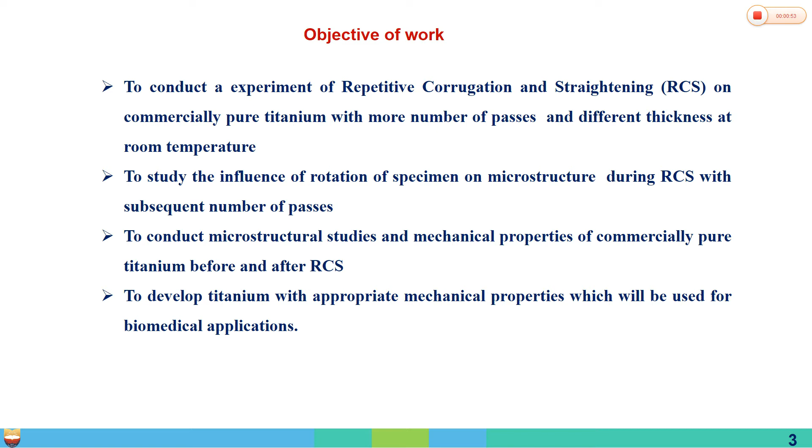We conducted a review of the literature related to this work. Different researchers and academicians worked on different severe plastic deformation techniques in order to increase the strength of commercial pure titanium. Some of these I have highlighted here. First is the ECAP route used for increasing the strength of commercial pure titanium. They achieved good strength and tensile properties by using the ECAP BC route compared to the other routes.

Another researcher investigated the microstructure and mechanical properties of commercial pure titanium processed by the twist extrusion technique. They achieved good strength by reducing the grain size to less than 1 micrometer, which enhances the strength of the material. Another researcher processed pure titanium with the accumulative roll bonding technique. They achieved an 80 nanometer grain size after 5 ARB cycles. After 6 passes, the strength of the pure titanium was almost equal to the strength of Ti-6Al-4V.

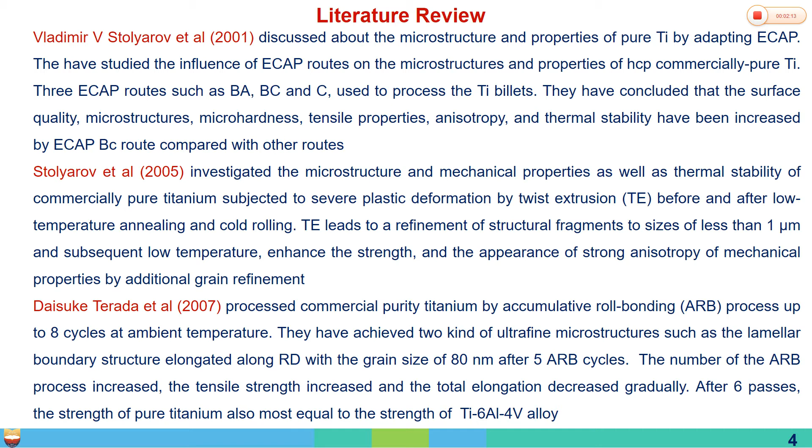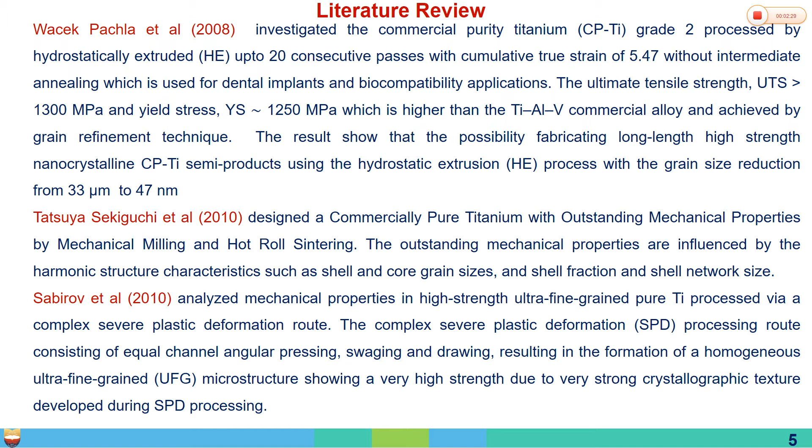Based on this work, different techniques have been used to achieve a strength of commercial pure titanium equal to that of Ti-6Al-4V. Another researcher hydrostatically extruded commercial pure titanium up to 20 consecutive passes. They achieved a good yield strength of 1250 and an ultimate strength of 1300. So out of this literature, the summary says that

commercial pure titanium strength was increased by grain size reduction or grain refinement by adopting different severe plastic deformation techniques. So from this literature we came to know that severe plastic deformation increases the strength of the material and also increases the tensile strength through grain refinement and grain reduction.

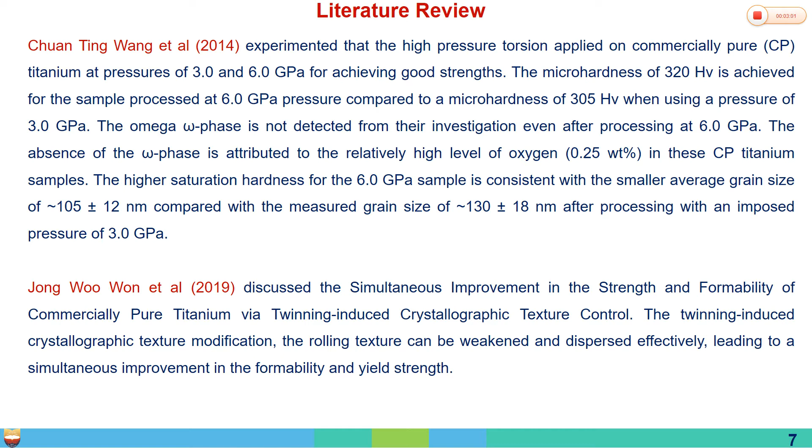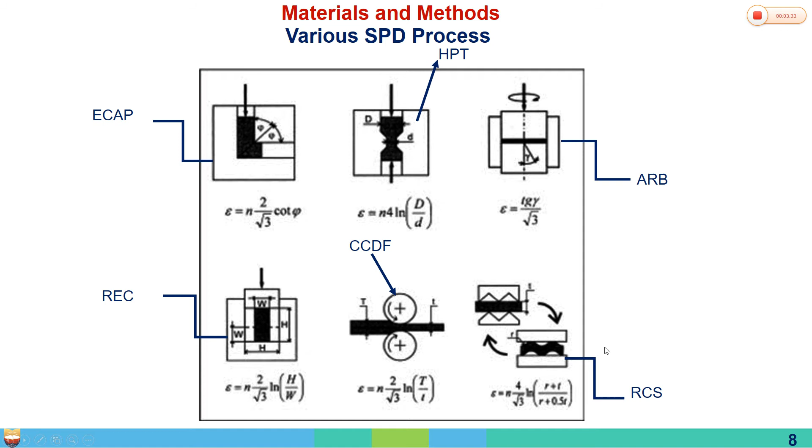Here are the materials and methods: various SPD techniques, as we have seen in the literature. ECAP, HPT or high pressure torsion, ARB or accumulative roll bonding, repetitive corrugation, and closed die forging. These are different severe plastic deformation techniques. Out of these we have chosen repetitive corrugation because with this technique we can easily process material sheet or plate, so it can be used for mass production also. For that purpose we have chosen this technique.

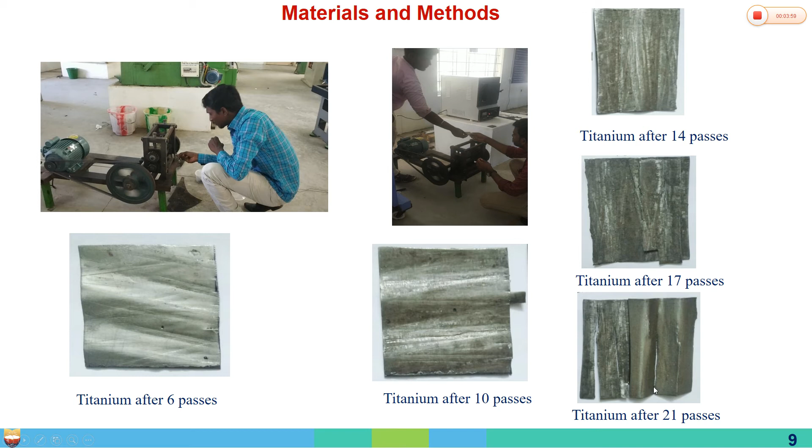These are the students who were involved in doing the experiments. This is the repetitive corrugation and straightening machine. There are 2 rollers, one for corrugation and one for straightening. These are the specimens after a number of passes. You can see the difference between 6 and 21 passes, and that the material has been strengthened. An annealing process was also adopted.

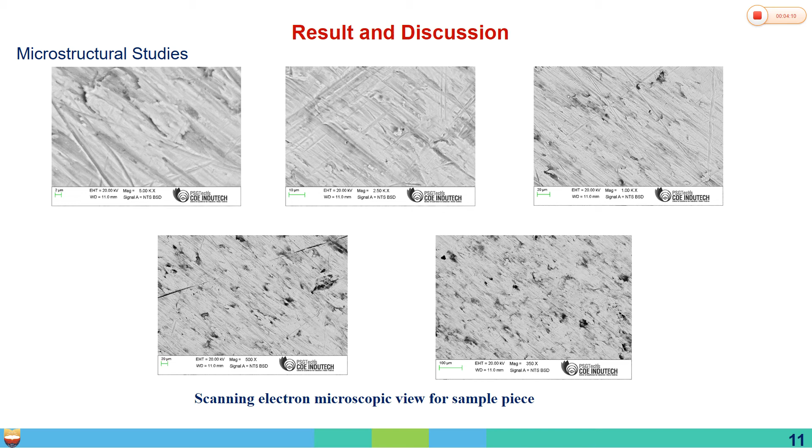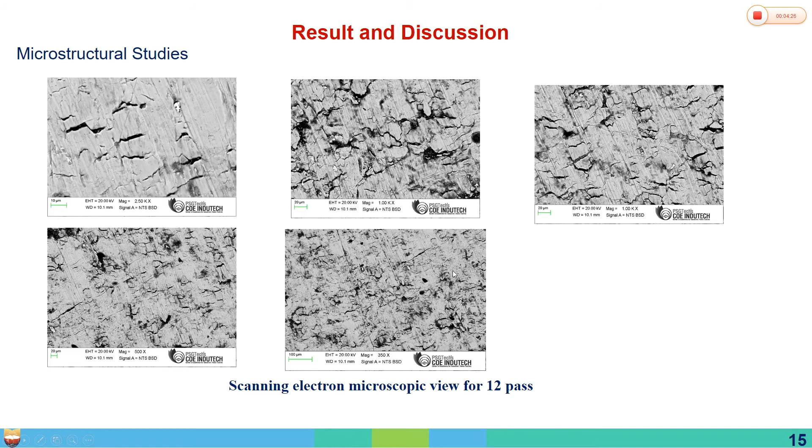The SEM image microstructure shows the raw specimen, and the microstructure after 1 pass and a number of passes. After 12 passes, grain refinement and reduction take place, and after 21 passes you can also see grain refinement taking place, and after 24 passes in the annealed condition as well.

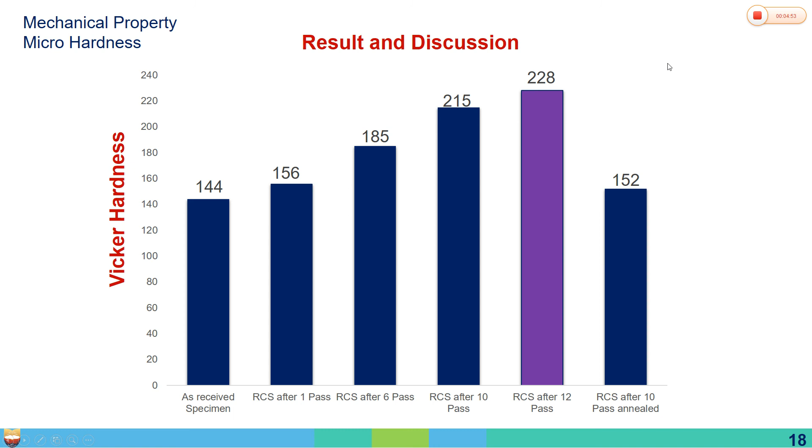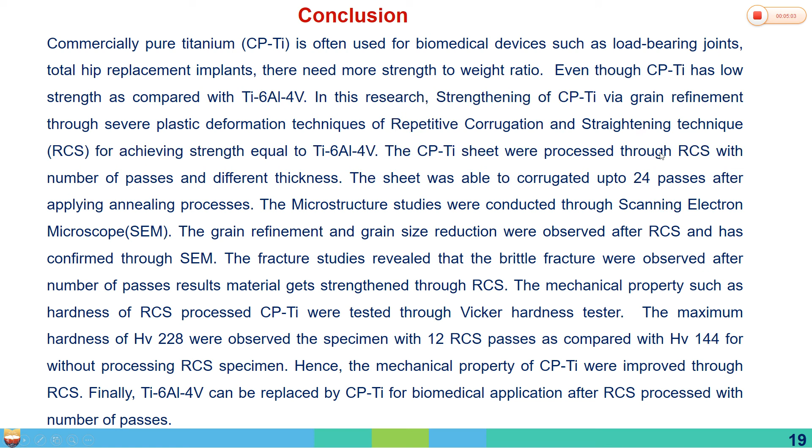The conclusion is that for commercial pure titanium, we adopted the repetitive corrugation and straightening technique to increase the strength of the material, so it can be applied for biomedical applications.